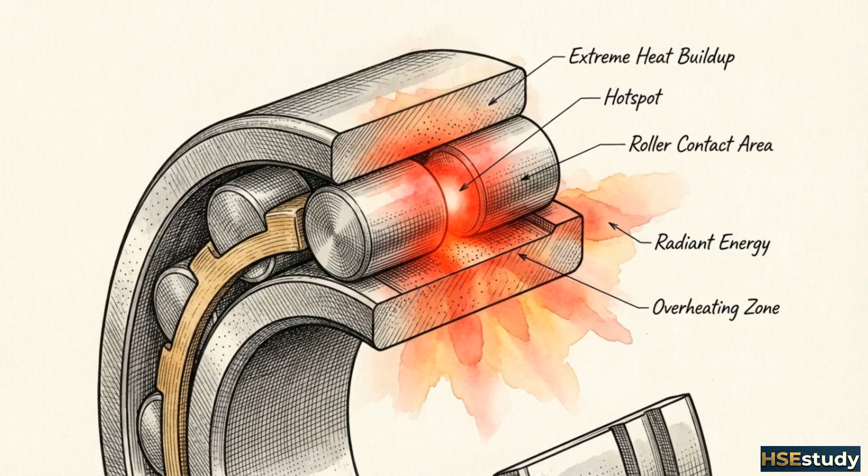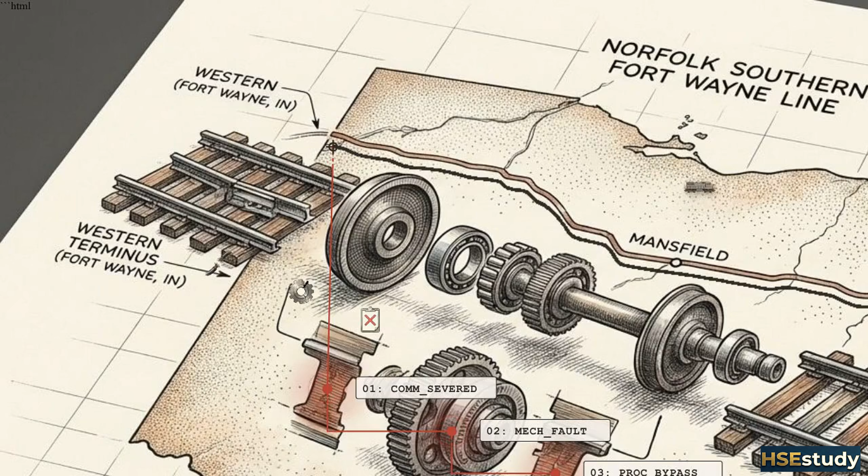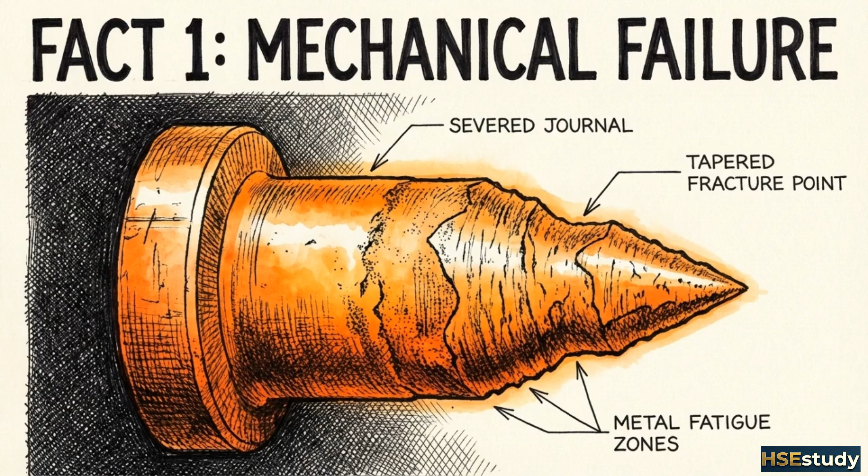The disaster in East Palestine, Ohio, is often characterized as a sudden collision, but the physical evidence tells a different story. This was a progressive, real-time cascade of mechanical, procedural, and communication failures that stacked together over dozens of miles. The National Transportation Safety Board investigation established 3 distinct facts about this incident. First, the physical derailment was triggered by the failure of a single overheated wheel bearing.

Second, the multi-million-dollar network of wayside track sensors detected the overheating, but flawed system logic and human workload meant the crew wasn't warned in time to stop the train. Third, the massive chemical burn conducted days after the crash, which released a toxic plume over the region, was later determined by investigators to be entirely unnecessary.

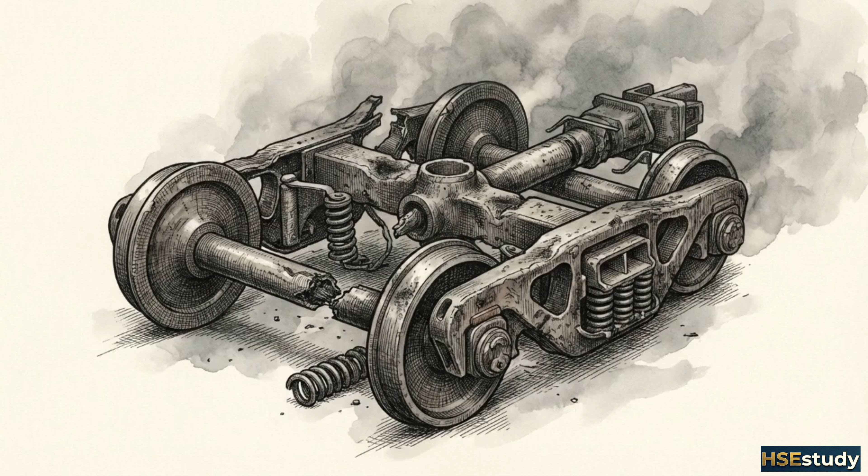Analyzing a complex industrial disaster requires looking past the wreckage. We have to map the systemic blindness that allowed a single failing bearing to destroy an entire train. The roller bearing encases the axle. Lacking federal maintenance requirements, they are rarely inspected.

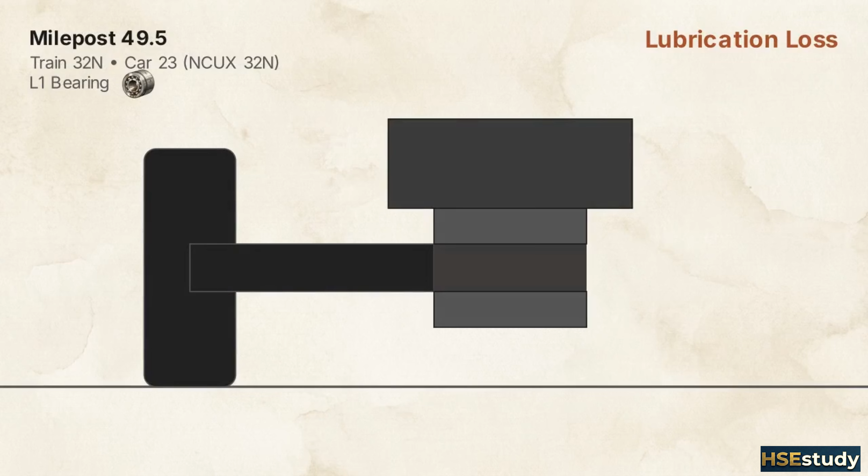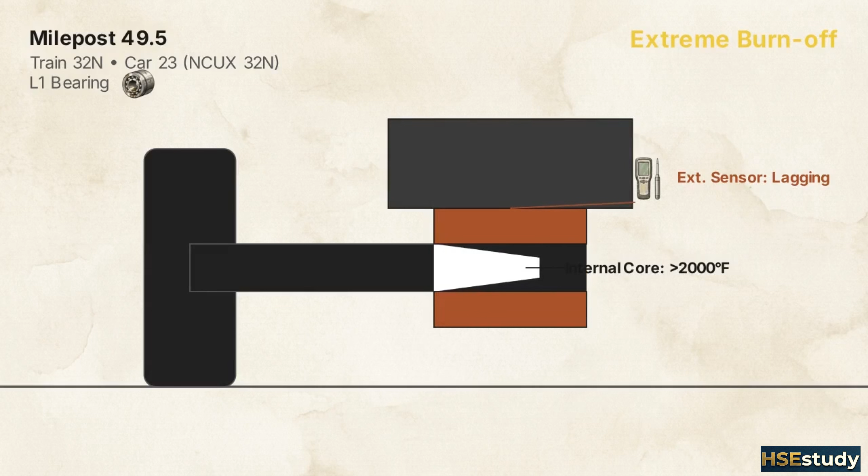On Train 32N's 23rd car, the L1 bearing lost lubrication. Friction drove internal temperatures past the steel's limits. This extreme burn-off ground the journal into a cone until it completely separated. When the axle severed, it dropped the railcar directly onto the track at milepost 49.5, instantly triggering the train's emergency braking system.

The kinetic energy of the heavy freight train forced 38 railcars off the tracks, piling them into a dense, compacted zone of wreckage. While physics dictates how the metal failed, the true breakdown was procedural. The monitoring system meant to catch this failure remained functionally blind until it was too late.

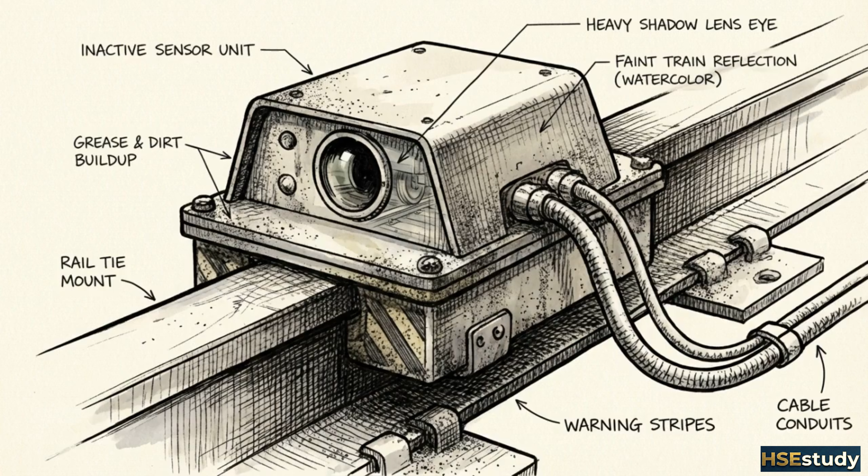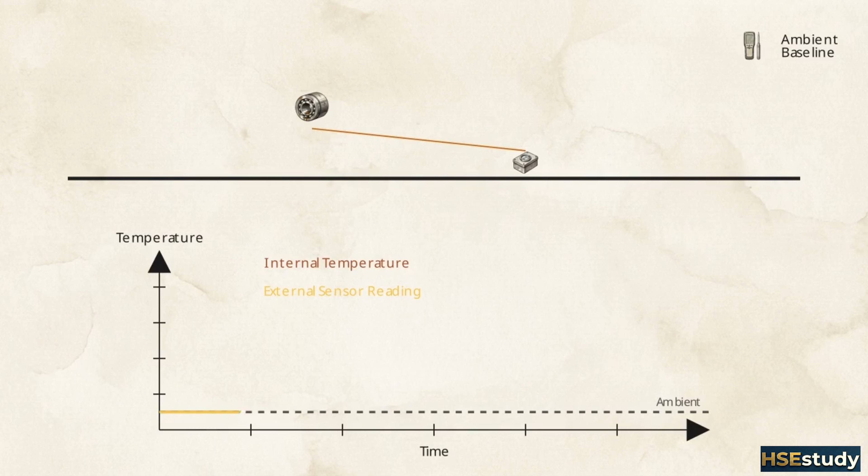This cross-section illustrates how hot box detectors operate. Railroads use infrared track sensors to measure the temperature of wheel bearings against the ambient air as the train passes over them. These sensors only measure the exterior of the bearing cup. If the interior elements seize, the external reading can lag 30 to 60 minutes behind the actual thermal event happening inside the axle.

30 miles before the derailment, the train passed a detector in Sebring, Ohio. The sensor recorded a bearing temperature of 38 degrees Fahrenheit above ambient. Because it fell below the programmed threshold, the system triggered 0 alerts. At Salem, the sensor recorded a temperature of 103 degrees above ambient. The system classified this as non-critical.

This alert was routed to a remote help desk analyst in Georgia, who was managing a high workload of higher priority alerts. Consequently, the crew in the locomotive was never notified. Local surveillance video captured in Salem at that exact moment showed the wheel bearing was already visibly on fire, contradicting the non-critical data label.

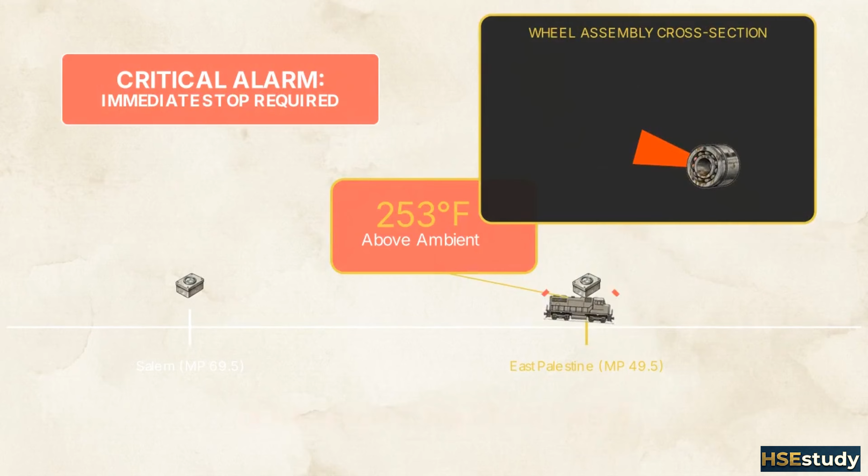Only when the train reached East Palestine did the detector record a severe spike of 253 degrees, finally triggering a critical cab alarm. But by then, the journal had already failed. The industry lacks a centralized database for bearing failures, making it difficult to set more effective detector thresholds. Between the sensor lag, the 20-mile spacing, and the lack of empirical data, the speed of the failure simply outpaced the system.

Flammable liquids spilled from the wreckage, igniting a massive trench fire. As local responders arrived, they faced a critical information gap. They had to wait nearly an hour before the railroad transmitted the train's manifest, or consist, detailing the hazardous materials on board. The initial blaze was fueled by legacy DOT 111 tank cars. These older models breached at a rate of roughly 50% upon impact, releasing their contents directly into the fire.

5 intact DOT 105 tank cars carrying vinyl chloride monomer survived the kinetic force of the crash, but they were now trapped in the burning pileup. Responders and on-site contractors feared polymerization, a rapid, self-heating chemical reaction they believed would ultimately lead to a catastrophic explosion. This fear was based on generalized safety pamphlets rather than real-time data.

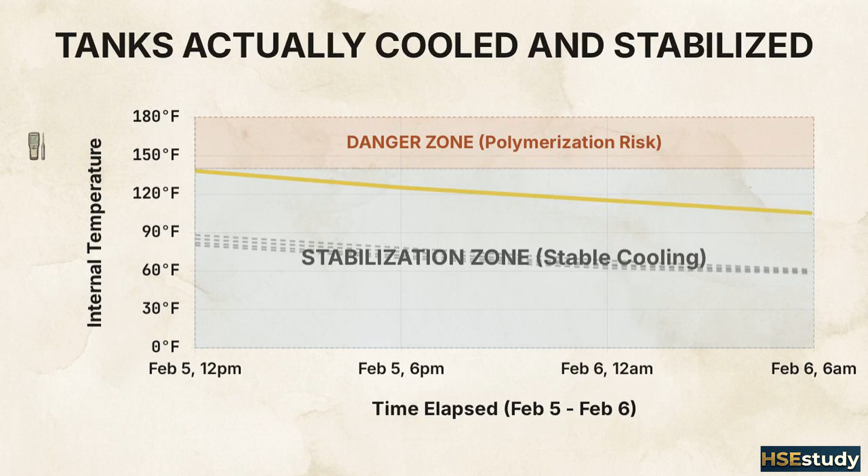In reality, temperature monitoring showed the tanks were actually stabilizing and cooling. Oxyvinyls, the chemical manufacturer, reviewed the site data and confirmed polymerization was not occurring. However, this expert analysis was siloed and never reached the incident commander. Operating on biased information, contractors gave the incident commander an artificial 13-minute window to authorize an extreme vent and burn procedure.

Explosives were used to breach the 5 tanks, igniting the vinyl chloride and sending a toxic plume over the community. The NTSB later ruled this entire procedure was completely unnecessary. The most dangerous element on a hazardous site is an isolated incident command making irreversible decisions based on unverified assumptions.

Large-scale disasters occur when multiple independent safety layers fail simultaneously. This is the Swiss cheese model. In East Palestine, 10 specific barriers failed. Barrier 1, the lack of periodic maintenance for freight rail cars. The control is a mandated 5-year comprehensive teardown inspection. Barrier 2, monitoring systems that only read external temperatures. The control is to invest in acoustic or internal predictive sensors.

Barrier 3, rigid thresholds that misclassified the early signs of failure. The control is to lower critical thresholds based on actual failure data. Barrier 4, the 20-mile detector gap that delayed the reaction. The control is reducing detector spacing to an average of 15 miles. Barrier 5, the high breach rate of legacy DOT 111 cars. The control is accelerating the phase-out of these models for hazardous service.

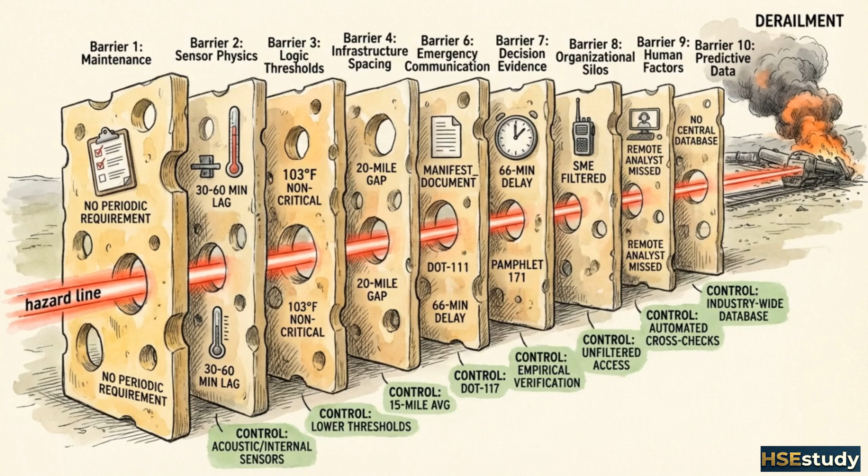Barrier 9, a remote analyst workload that allowed a warning to go unnoticed. The control is automated cross-checks for high-risk thermal trends. Barrier 10, the lack of a centralized bearing failure database. The control is an industry-wide database to drive better predictive safety algorithms. Correcting just one of these 10 failures could have broken the chain and prevented the disaster.

Question 1. In predictive maintenance, what does a rising temperature trend actually signal? It signals impending mechanical failure. It is never a justification for a wait-and-see approach. Questions 2 and 3. True or false? Normal detector readings prove a system is safe. And who must receive verified info during an incident? False. External sensors always lag, and the incident commander must have direct contact with all subject matter experts.

Question 4. What is the biggest HazCom mistake? Question 5. Can emergency urgency replace verification? Filtering dissenting expertise is fatal, and unverified assumptions lead to unnecessary catastrophic actions. The professional standard is replacing assumed safe with empirically verified safe. Audit your own systems using this checklist. Review your SOP escalation logic, ensure unfiltered command communication, and trust empirical data over generalities.